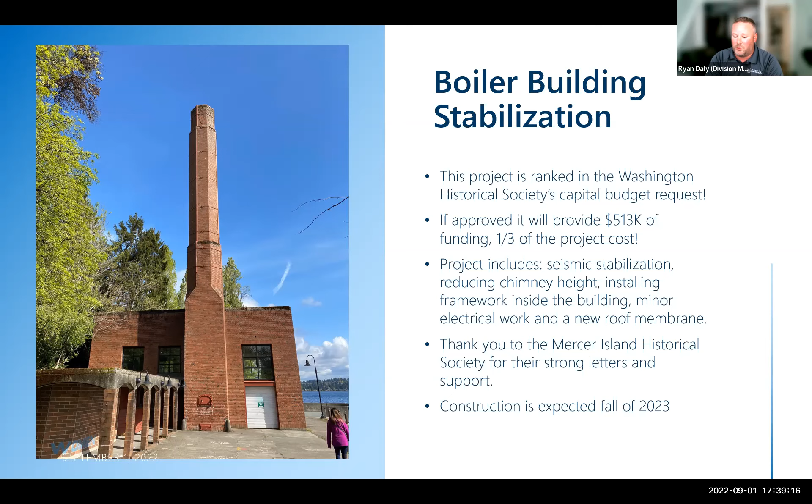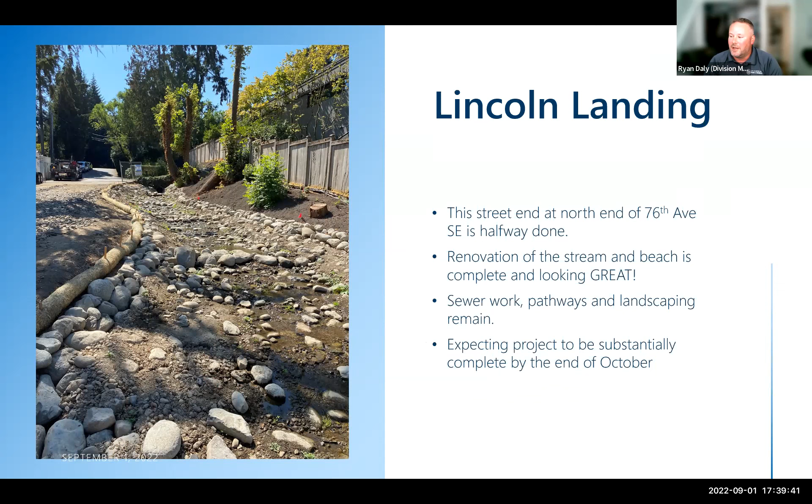Mercerdale Playground - how can we not talk about this one? The ribbon cutting, thank you to all who attended. It was outstanding. The park sees a ton of usage, we're seeing a lot of people out there, but we're not done yet.

It's important to emphasize there are some punch list items that need to be completed. The Northwest Playground will need to close for about a day in late September to finish some equipment replacements, some cosmetic details, signage, and install a final bench as well.

There is a park sign - thank you Chair McCarthy and everybody who chimes in and lets us know about these issues that pop up - that was inaccurate, stating the playground was for ages 2 to 5, when in actuality it's from 2 to 12 years old. So that sign is being replaced, and that's extremely helpful because we want to reduce any confusion out on that facility.

We're jumping around a little bit. South Mercer Playfields, just as a reminder, this is a city and school district joint project.

The school district is the project manager. This began back in July with completion scheduled for this November. The project will convert field number 3 and number 4 to synthetic turf and install lights, and replace the turf on fields numbers 1 and 2. The turf on fields 1, 2, and 3 has reached the end of its useful life.

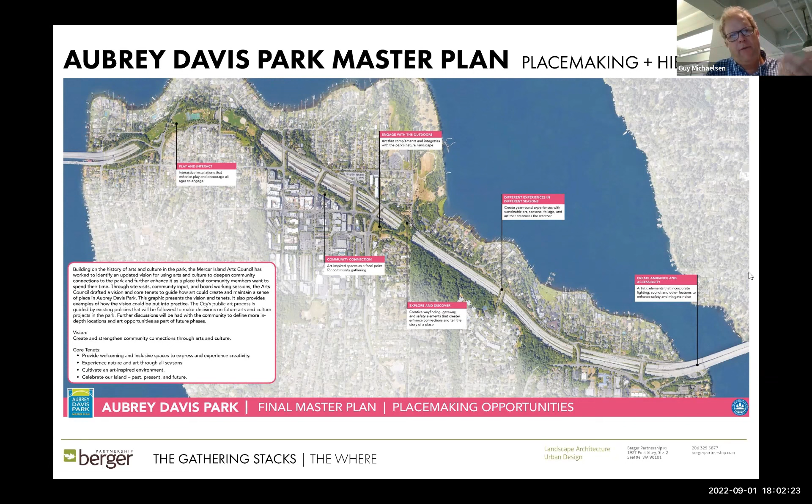In some places that volume is really low, and in some places you deliberately try to turn the volume up. So I'm going to make up a volume here. Most of the time when I'm thinking of Aubrey Davis, I feel like the volume is like 3 or 4. It's there, it's wonderful, you're moving through it, you're hanging out there and experiencing it. But there are places where we can turn that volume up higher. The downtown sculpture park is already one of those places. As we think about placemaking, we think there is this opportunity at this site where we can do a little more placemaking, create a little more there, and turn that volume up a little bit. So we think that's this opportunity in the global perspective.

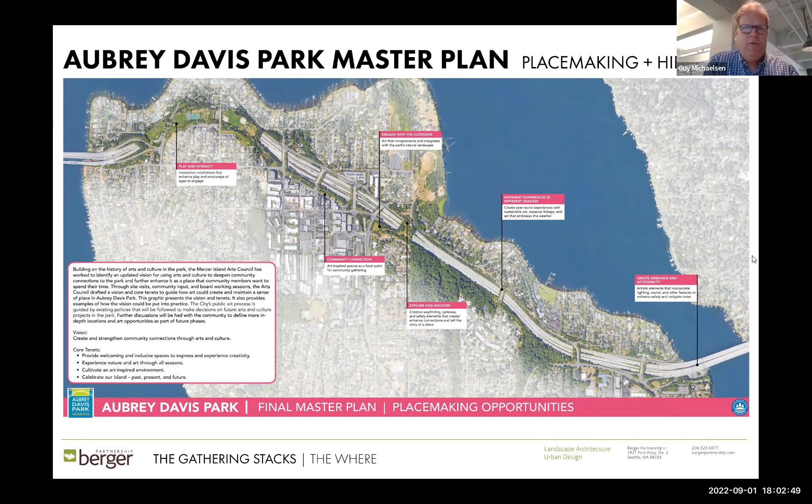And when we zoom in on the site, next slide, we're mindful of the overall vision, the core tenets. I'm not going to read the slide to you, that's painful, but I will say provide welcoming and inclusive spaces to express and experience creativity. I hope that you're going to see that this project does that.

And then specific to the Aubrey Davis lid, is the idea of play and interact, pulled straight from the master plan. Interactive installations that engage play and encourage all ages to engage. So hopefully after you see our proposal, you'll agree that it is accomplishing the placemaking guidelines set forth in the master plan.

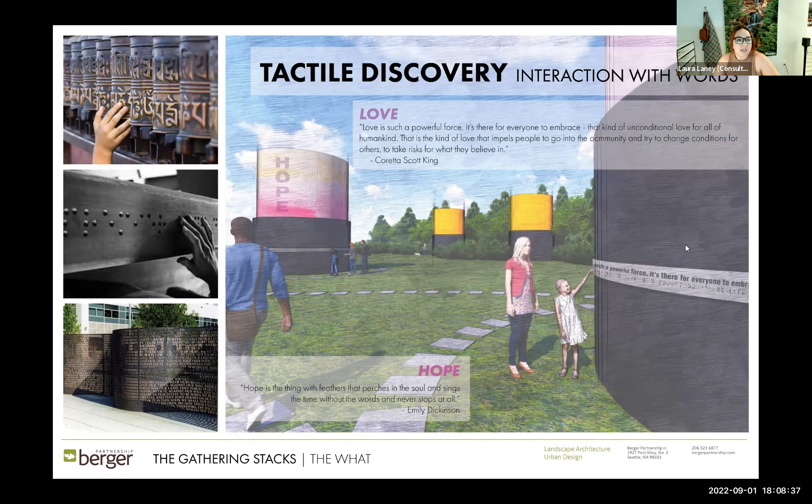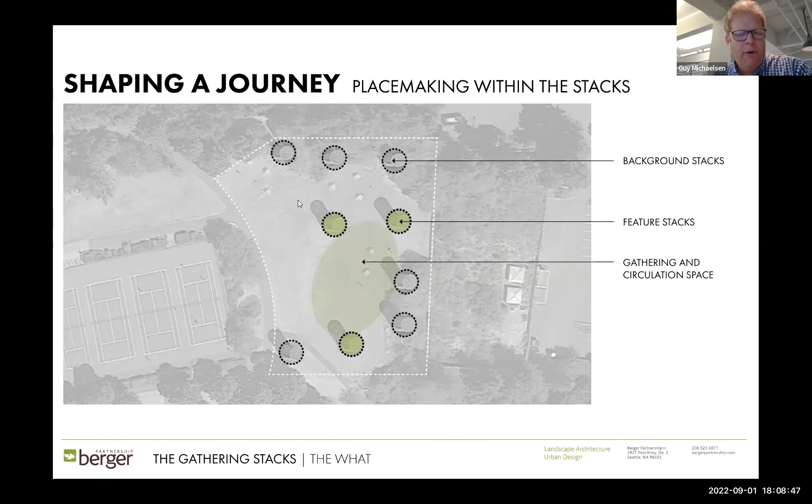That brings us— I want to chime in on something here real quick, Laura. You can go back a slide. Yeah, one second. So a good park experience works on a number of layers. Look what we've done. I'm sorry about that, Laura.

It's just this idea, wait a minute, there's that big thing there. Wait a minute, I'm not even there yet, but I see color. I'm intrigued, I'm going to invest in this a little bit more. Wait a minute, now I see a big word. Now I'm really intrigued. It's this procession where, with each step closer, the experience actually becomes richer. So to actually get right up there and then be like, well, what's with that word, but then to unlock the puzzle of this poem, this haiku, this quote, whatever it is.

And I do want to point out, we love the idea of Braille being on there as well. There's a magical thing about Braille. At least for a lot of people I know, and certainly for me, I don't read Braille, but anytime I see a sign, I kind of end up running my fingers over it just to feel it, which is actually not, I don't think, how you read Braille. But it has this tactile quality to it. It's not just inclusive in appearance, but it makes you want to touch it. And that's why we love this picture of the prayer wheels here, where it's the patina where everyone touches it.

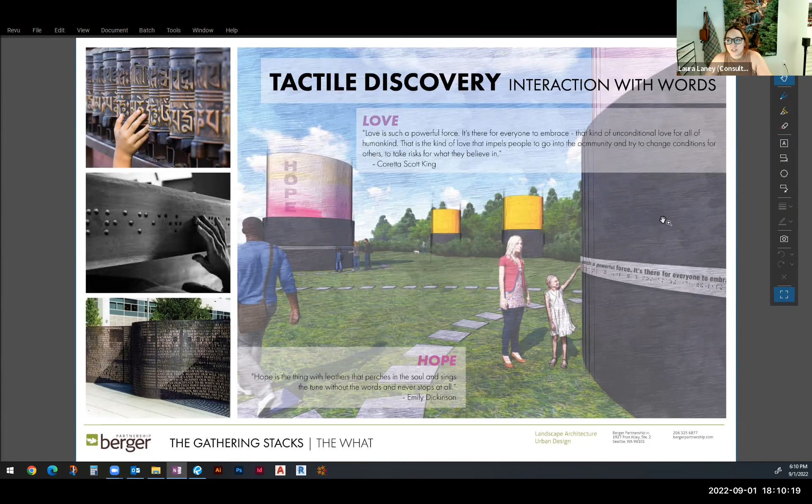So that's this idea of it starts big with color, it kind of draws you in more with the word, and then when you get there, it gets richer and richer and more rewarding, the whole experience. So that effort of getting closer brings us to a new layer of discovery,

which is one within the site itself. So we know the scale of the stacks draws you into the space, but once inside, there are three that really become the internal focus. These three just really feel like the strongest opportunity when you're out there, and you want to move around and through them. The surrounding background stacks are critical to provide that full impact, but really the three feature stacks are the heart of the proposal and where we would want to introduce the meaningful interaction.

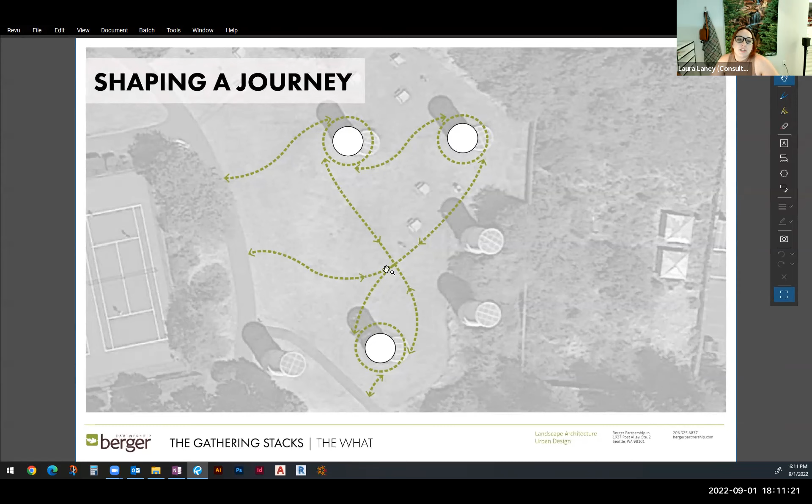Orientation is key. So as a user walks through the space, we wanted them to circulate around these feature stacks and be guided onward to the next one. So say you're engaging with this one, you would walk around and see another one, and that's directing you forward and onward. These journeys are circuitous, and no matter where you land at a point of convergence, this becomes a spot for gathering, as you'll see in a minute.

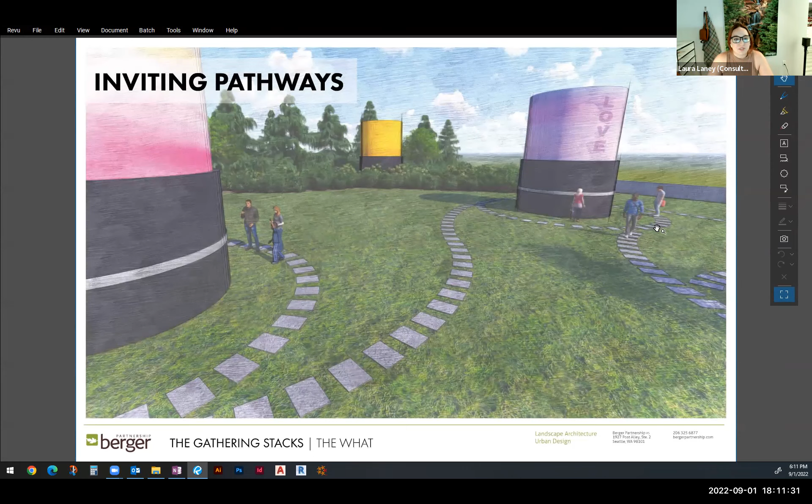The pathways would be simple stepping stones leading the users through the site, but they also become a tool to emphasize our story and promote connection by being enriched with word and thought.

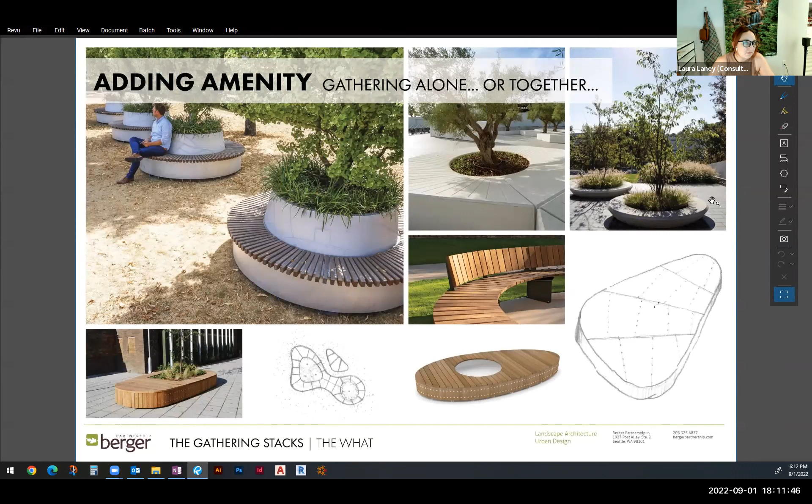And the last layer becomes the need for amenity, having a place to sit, stand, gather, play, and they evolved from the need for forms that worked within that journey to accommodate multiple needs, including the need to get planting in here. We can't forget that we are on a lid, and there's obviously infrastructure and structural things to be aware of. So having constructed platforms that don't add too much significant weight, while also housing above-ground planters to grow trees, ultimately provide shade and more intimate areas, because those trees bring a ceiling that adds a bit of a human scale to the project.

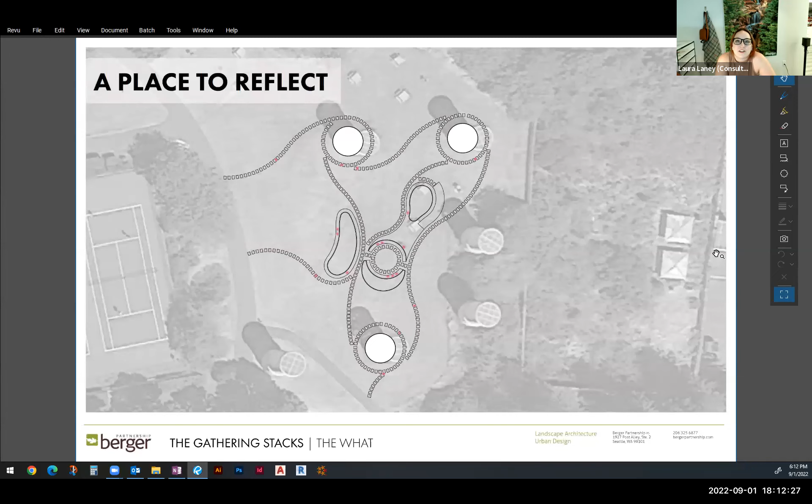So we'll look at a rendering here in a second, but this is a plan view of how these amenity forms take shape. And this diagram is showing how a user might use this space to reflect, relax, take time on their own or with another. All of those little pink dots are people.

If you remember that point of convergence in the pathway journey, we've utilized that point in space as what we like to call the council ring, a circular bench seating area that can be used for passive interactions. But knowing that the space is not only about introspection and reflection for individuals, this diagram shows how a group might use the space to convene. An open lawn space for people to gather with the platform amenity gives the opportunity for a small stage of sorts if needed.

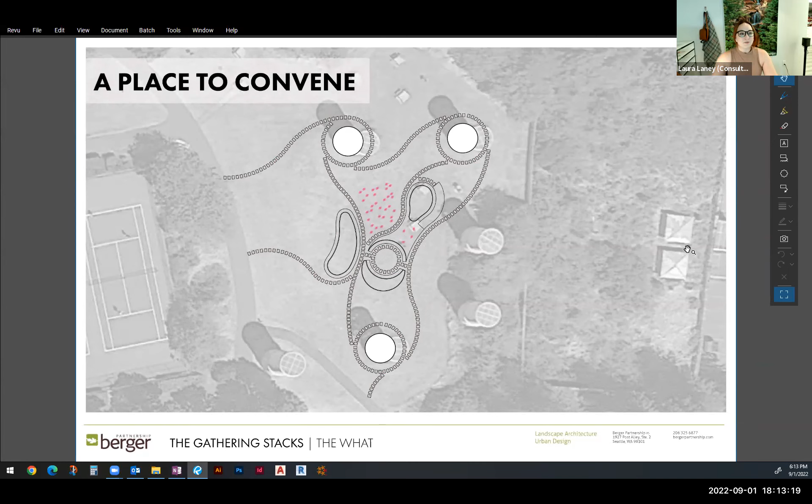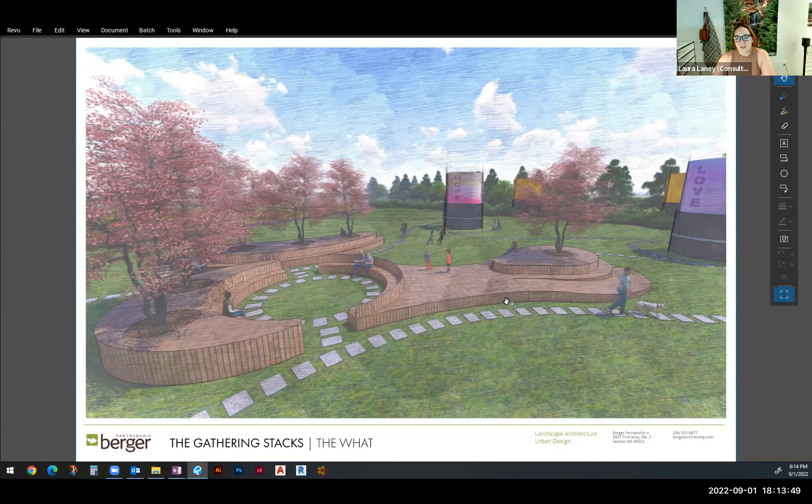So here's an overall perspective of that largest amenity piece, and it's a little easier to understand than a plan view. You can see you're situated within the journey. We've got the stacks happening back here that you're moving through and around. You've got a platform stage for group things or to lounge. We've got a ramp on the side for accessibility, plus kids are going to be running all over, up and down. And then that central point of convergence, that council ring, right here.

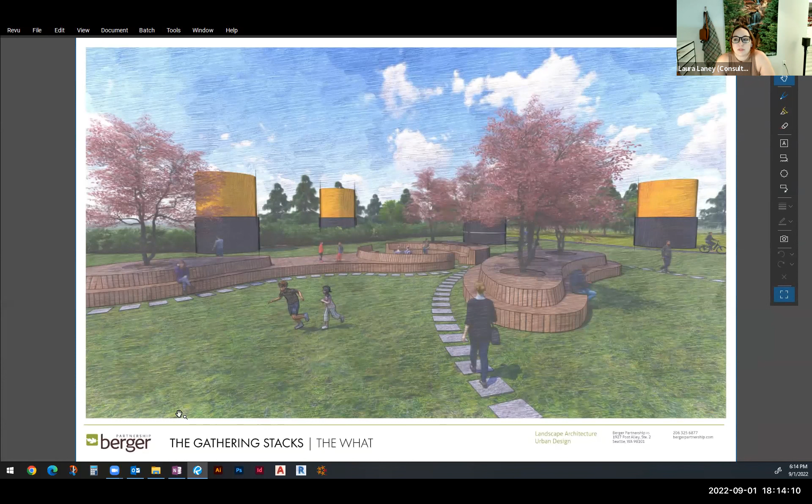And now if we look at it from the other side, you get a view of that open lawn space, to really keep that open field available for play, but also as a place to gather as a group. And then this is the last little perspective here. It really shows an intimate scale with those trees, just a place to breathe, a place to be once you're within this area.

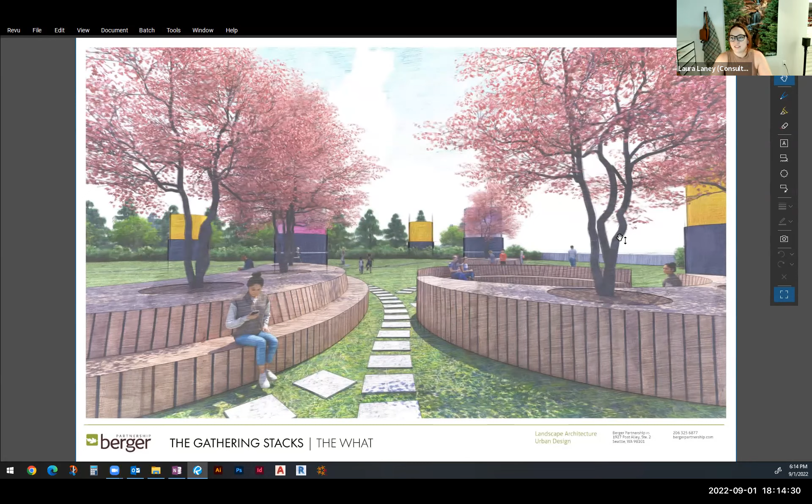So what's next? That is this idea that we have, and what we hope to do today and going forward is confirm community support. Again, we had what we think was a really positive meeting with the Arts Commission. We're excited to hear your thoughts on this today, and if we feel like there's support for the idea, we'll continue to work with the donor and hone donation details. Key of that being: how much do we want to donate? How much of this idea can we make happen?

I should say that this whole proposal is very much designed to be nimble, to be phased. We don't have to do the whole idea. It's not contingent upon additional monies being done, but if it gained support and other people wanted to give money and grow it, great.

But that would be our next step, if there's support for the concept, to come in and keep figuring out those details. And then, as I said several times already, we have to coordinate with the city, and Ryan and the city team can kind of help us understand what that process looks like, but also really continuing to hone the idea with WashDOT.

And I should say, it's not an accident. We do a lot of work with WSDOT. We've done a lot of work on lids. We understand usually what their issues are. And really, this whole thing is designed to be a very applied intervention on top of the lid. There is nothing integral here, nothing structural here. And in the ultimate guarantee, this whole thing could be applied and could all be picked up and taken away if it proved to be problematic or of any concern. That lies at the heart of the design as well.

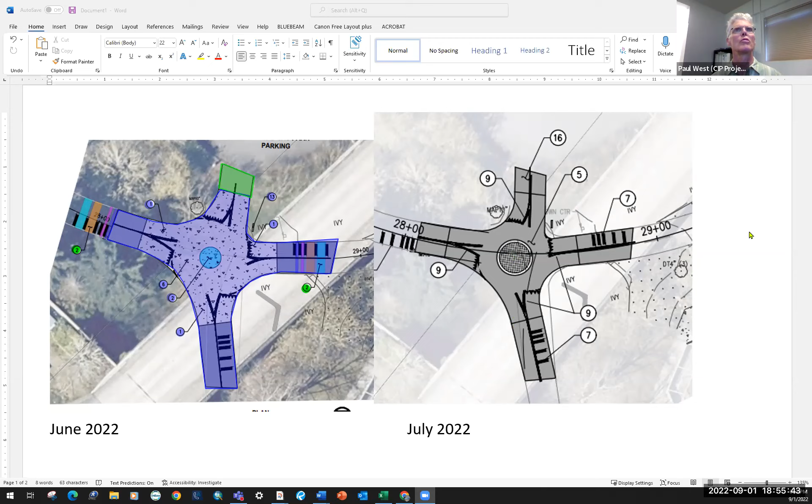At the July meeting, the roundabout had been changed to Schedule A, meaning that it was now in the first tier of items. And the circle in the middle was much larger and had a curbing. I don't remember if this was grass or asphalt at that point.

So then going from July to today, there's been additional evolution in this roundabout design. As you can see, to address the concern about pedestrians and bicycles meeting in counter rotation, the circulation path around this roundabout has been increased slightly from 8 feet to 10 feet, so that if a bicyclist does encounter a pedestrian coming the wrong way, that could be accommodated. And the other piece is that the spur trail from the parking lot has been reduced to 6 feet wide.

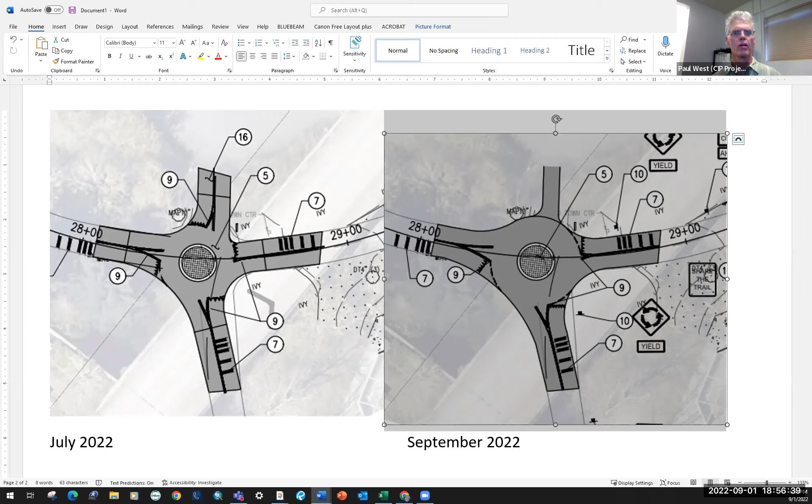So that's where we are on the roundabout today. The memo, the staff report, contains a bunch of issues that were addressed by the design team in this current design, and addresses some of the other concerns that have been raised in public comment. So I don't want to reiterate that necessarily.

I think you've all read that, but I would like to put up the list of comments we've gotten from commissioners by email. We could work through those now, Chair McCarthy, or we could just have a general discussion on the roundabout. What's your preference?

Well, I see Commissioner Cohen's hand up, so perhaps he has something good to add here. I don't know, I think maybe start with a general discussion and then we can go into these specifics. Mine was more specific.

Is it on this list, Don? I guess it is, yes. It would be under number 8, probably. What struck me in the staff report, this is Don Cohen, what struck me in the staff report was on page 2, where it says more study by the design team is needed about the safety of the roundabout.